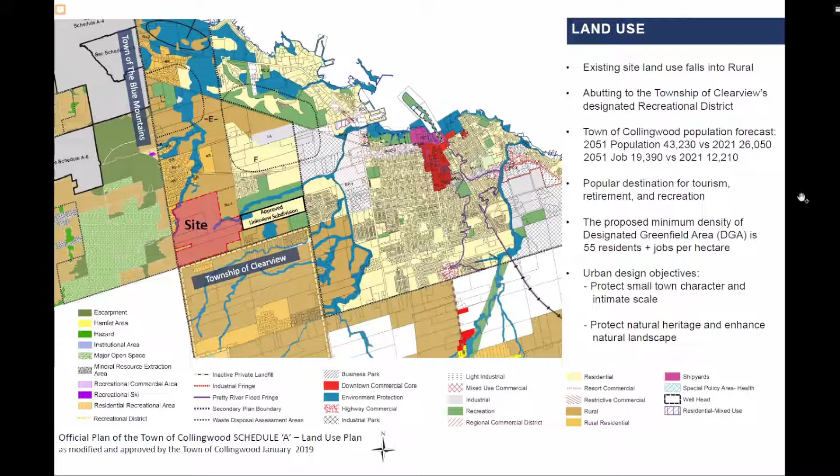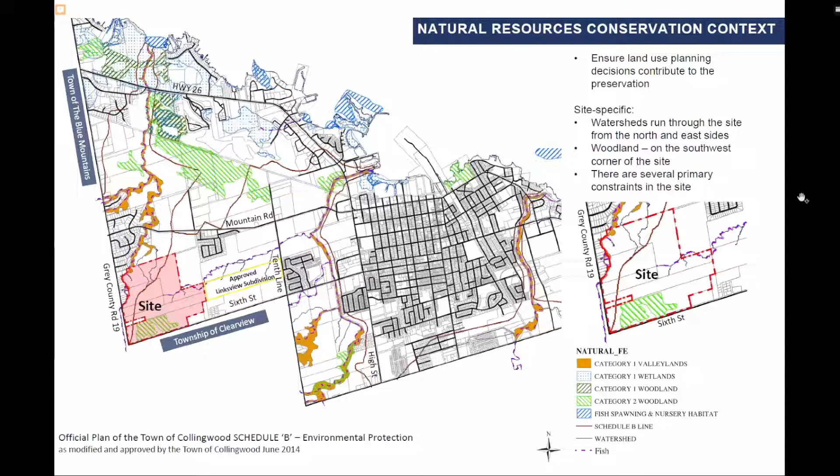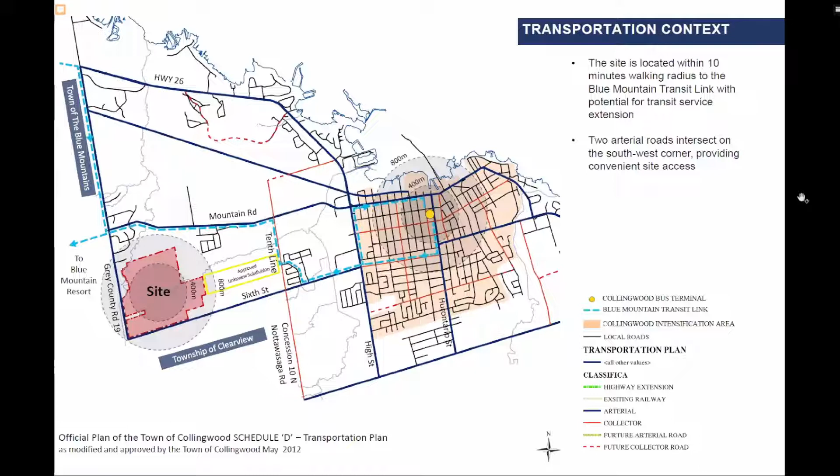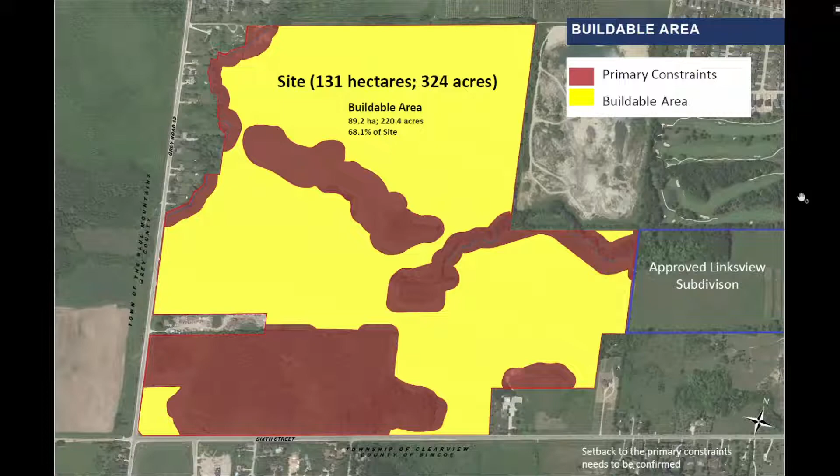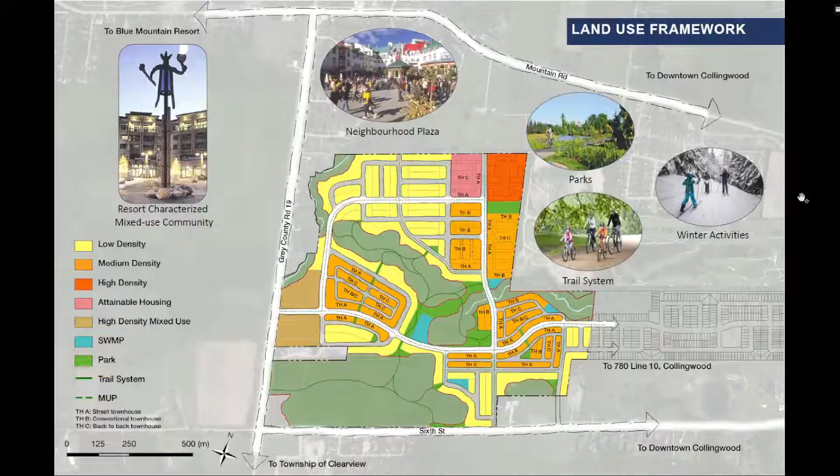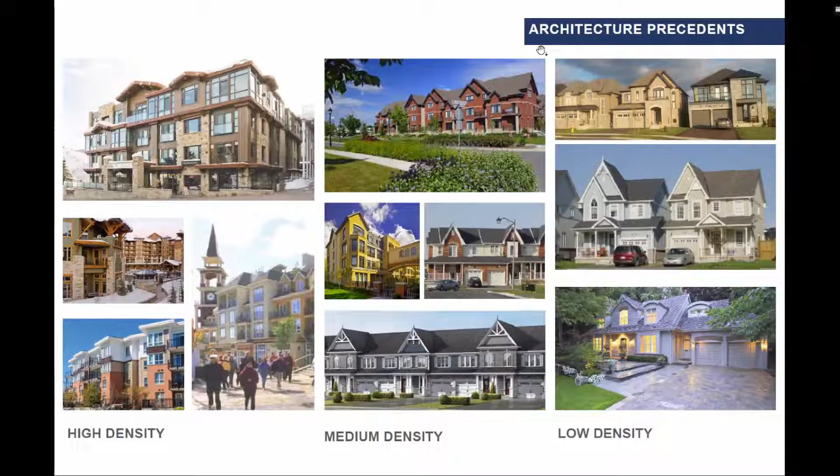My name is Shakir Rehmatullah, and I'm the president of FLATO Developments. Madam Chair and committee members, thank you so much for giving us the permission to come and present our vision with the town. We're looking forward to working with the town on this plan.

Once again, this is just a preliminary concept plan. This is our vision. We're not married to this plan. We understand it's going to go back and forth, and based on the input from the town staff, from council, and general public, this plan will be refined as needed. We just wanted to come in front of you to inform you.

We wanted to be transparent in front of you about the land assembly that we have done. We own the 100 acre parcel, which is draft plan approved, and then we have assembled this 324 acres.

We are in the planning phases. I know planning takes time and engineering takes time, and we understand that the town is going through infrastructure challenges, and we completely agree with the approach the town has taken. Our entire 100-acre parcel, which is draft plan approved, has also been affected by the infrastructure, the new policy, the interim control bylaw, and we agree with the town.

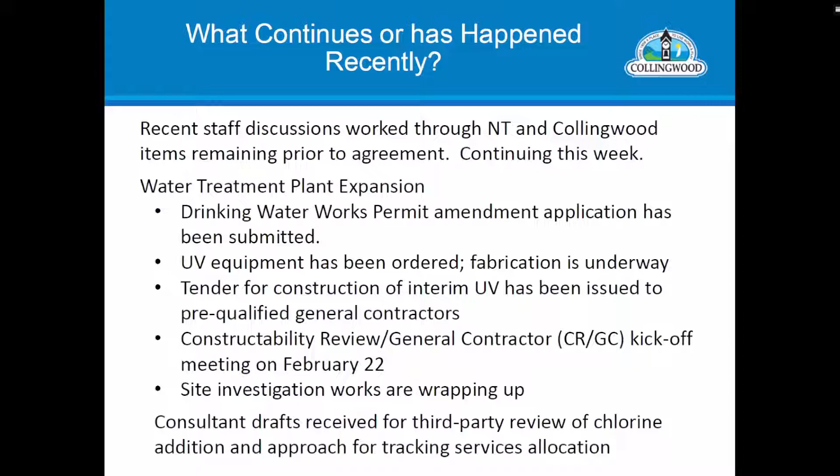The schedule has not changed. This is a graphical representation. The next things coming up are the completion of the preliminary design this spring and the finalizing of the agreement with New Tecumseh, but we are on track.

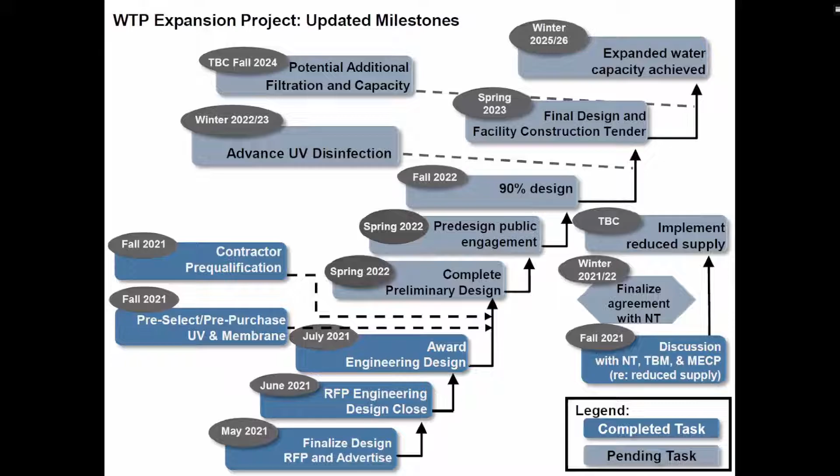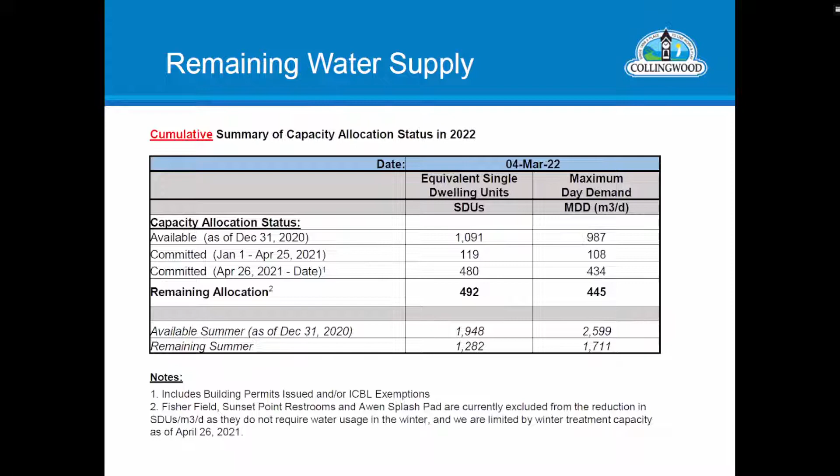The interim control bylaw exemptions I mentioned earlier in this presentation are exemptions to the interim control bylaw itself during the period of the interim control bylaw. Afterwards, water will be managed according to the recommendations, and the policy is coming forward this evening for committee's endorsement or review.

If you have an interim control bylaw exemption, please continue through the process to get your building permit. If you haven't been granted an exemption to date, we are processing planning applications at the staff side, going through reviews and making sure people know what's required. However, we're not intending to bring forward planning decisions to move projects forward to council until we have completion of the interim control bylaw. So with any luck, that will happen very shortly, and council can again commence making planning decisions of this type.

The second half of this is the planning policy study update. You can see from this graphical representation that we're very far along, and we're basically at the committee stage. Pending the decision tonight, in two weeks we would be at the council approval stage for a policy for the allocation of water and wastewater servicing.

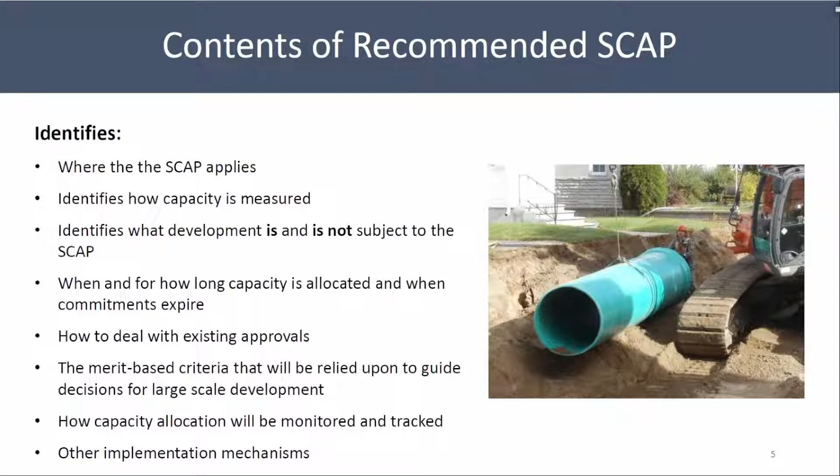As noted previously, this is the 3rd iteration of the policy document, and a number of changes have been made in response to community, staff, and legal input to add clarity where needed, to provide additional flexibility that recognizes the variety of contexts that apply in the decision-making process, and to remove any unnecessary provisions while retaining the core components of the overall merit-based approach to decision-making.

As Director Valentine indicated, all of the changes are shown in a track changes version of the policy on the town's engagement website. There are 25 changes I will quickly take you through. Some are more significant than others, but none are truly that significant. They all build upon the core policies that were initially established, and they continue to improve how the policy will work and be implemented.

So the first change we made is we added some additional context into the introduction to provide a further rationale for the need for the policy. This was designed, quite frankly, to provide the reader with a more fulsome explanation for the rationale for the policy itself, which of course is founded upon the need to manage a very scarce resource.

Secondly, the definition of additional residential unit has been expanded to now include additional residential units established in conjunction with institutional uses. This obviously provides additional opportunities for affordable housing and would be in addition to such units being permitted on residential and commercial properties.

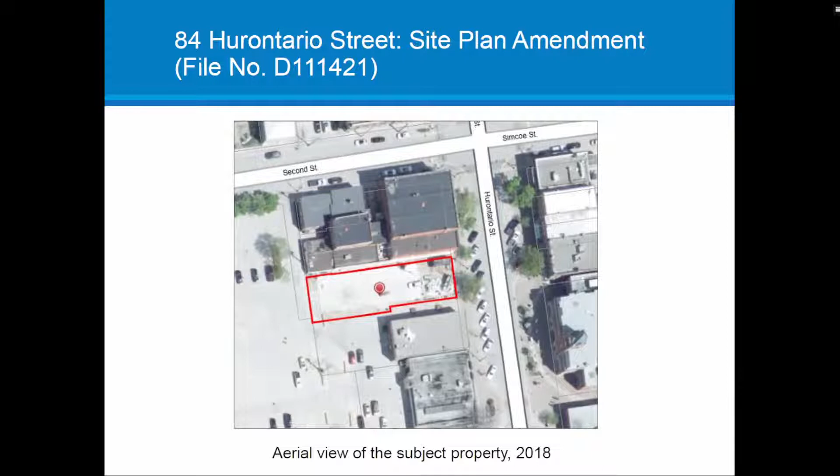Good evening, committee. As Director Valentine mentioned, this is a staff report on a site plan amendment for 84 Hurontario Street. Next slide, please. The subject property, known as 84 Hurontario Street, is located within the Collingwood Downtown Heritage Conservation District on the west side of Hurontario Street, south of 2nd Street, and immediately north of the CIBC Bank, and abuts town parking lot A to the rear. The property is 0.073 hectares or 0.18 acres in area, and the previously approved development for this site is known as the Regent. Next slide, please.

Council approved the site plan for 84 Hurontario Street on October 28, 2019. The approval is for a mixed-use development comprised of 12 apartments and 2 commercial units at grade. 13 underground parking spaces are proposed for the residential units. A heritage permit has been issued for the building. An encroachment agreement is still required as a condition of the site plan agreement to stage construction in a portion of parking lot A. Section 24 of the existing site plan agreement provides 2 years for the development to commence prior to the town being able to, but not required, to terminate the agreement with 60 days notice. The 2 years concluded on October 28, 2021, and the development has still not commenced.

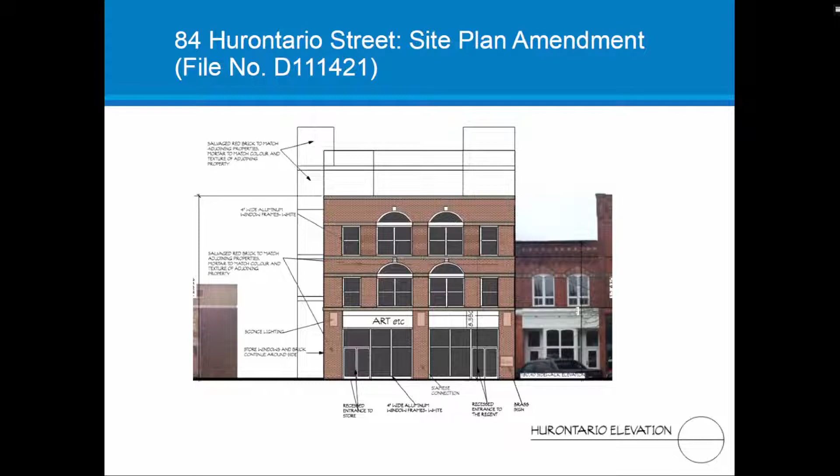The owner is now requesting that Section 24 be extended 1 additional year from the date of the execution of the agreement, ending October 28, 2022, to commence construction before the town would again have the option to exercise Section 24 if development had not yet commenced. The property received an exemption to the interim control bylaw in July 2021, and the one-year time frame for the proposed extension is consistent with the provisions of the servicing capacity allocation policy recommended for approval through the previous report, P2022-08. Next slide, please.

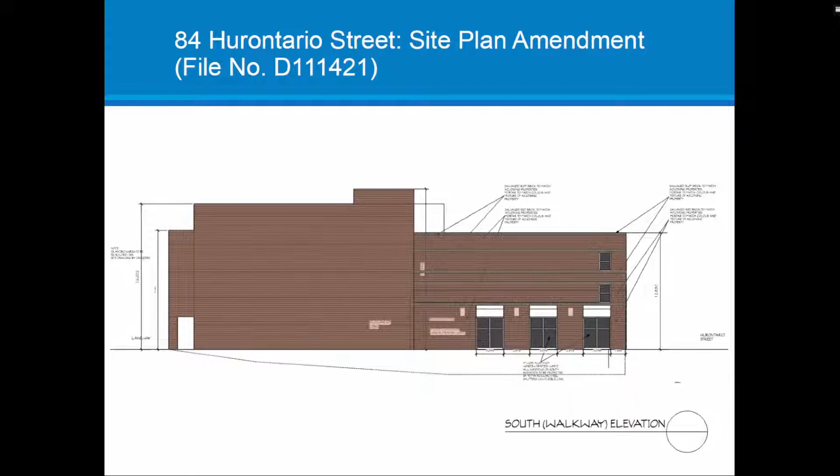No other amendments to the existing approval are requested, and the approved plans for the development would remain unchanged. This presentation includes the approved elevations for the building. The property is proposed to be sold, and this is a request as part of the purchase and sale agreement. Staff appreciate the owner's request to ensure there is certainty for the purchaser. The owner and purchaser are satisfied with the one-year extension because it is their intent to move to construction quickly. Staff are still in favor of the proposed mixed-use development proceeding, as it would infill an otherwise vacant lot on the town's main street, provide much-needed apartment residential units, and enhance commercial opportunities downtown. The proposal continues to be consistent with and conform to the relevant provincial, county, and town planning policies. Next slide, please.

It is the opinion of planning services staff that this proposed request for a site plan control amendment is appropriate and consistent with and conforms to the relevant provincial policy, the county's official plan, and the town's official plan. As a result, planning services staff recommend that council approve the site plan amendment application number D111421, and that council enact and pass an authorization bylaw to execute an amending site plan control agreement for 84 Hurontario Street, with Section 24 providing an additional 1 year for construction to commence. That concludes my presentation, and I'm happy to answer any questions.

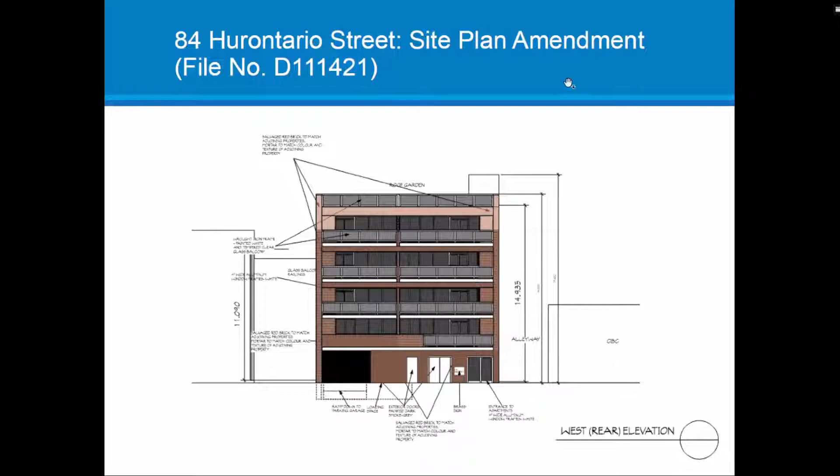Thank you for that. Clerk Almas, would there be any members of the public who have any comments? Thank you, Chair Hamlin. Again, if you wish to address the committee regarding this application, please press the raise your hand feature at the bottom of your screen. There's no one at this time.

Okay, thank you. I'll bring this matter to the floor. That's staff report P2022-07, authorization bylaw to execute an amending site plan control agreement, 84 Hurontario Street, the Regent, file numbers D111421 and D112117, and that council approve site plan amendment number D111421, and that council enact and pass authorization bylaw to execute an amending site plan control agreement for 84 Hurontario Street with Section 24, providing an additional 1 year for construction to commence.

Could I have that motion moved by Councillor Jeffery, seconded by Councillor Doherty? Any comments or questions from the committee members? Seeing none, bring this matter to a vote. All those in favor? And that's passed unanimously.

Thank you. Next matter on the agenda is P2022-09, draft plan approval extension request for Red Maple. Director Valentine, would you like to start this one off? Thank you again, Madam Chair.

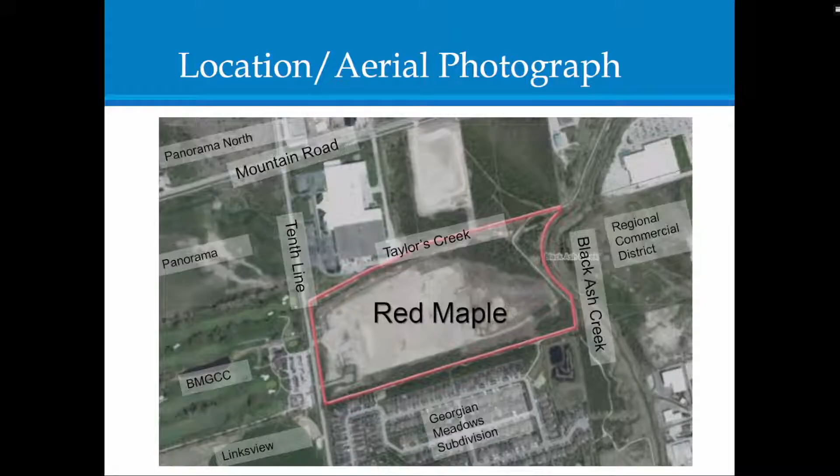The subdivision proposes 278 residential units, consisting of lots for 131 single detached dwellings, 56 street townhouse dwellings, and a block for 91 condominium townhouse dwellings. The subdivision also includes a number of blocks for parkland, environmental protection, walkways, and servicing purposes.

The draft approval was originally given in March of 2013. It was subsequently revised in November of 2014 and has been extended twice, the last being in 2019. The developer, a numbered company, 2721733 Ontario Incorporated, has picked up the property from the previous owner and has requested a 3-year extension as the current draft approval lapses on March 25th, 2022. As I understand it, the property changed ownership in late 2020. Next slide, please.

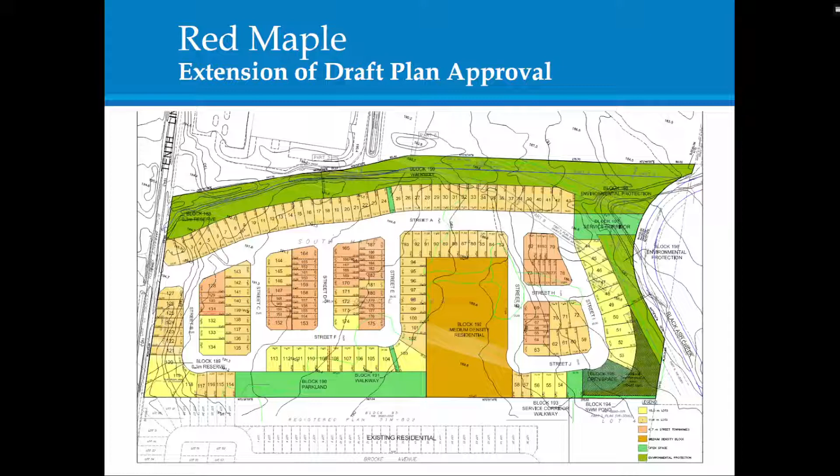Given the challenges the municipality is facing with servicing, it's important to view this request in the context of the proposed servicing capacity allocation policy, SCAP, discussed earlier this evening. The policy indicates that if lands are subject to draft plan approved plans of subdivision or vacant land condominium descriptions before the allocation policy comes into effect, the town will seek to amend the conditions of draft approval for all existing files to confirm there is no capacity commitment. If uncommitted hydraulic reserve capacity exists within both the water treatment and wastewater treatment plants, the developments would be evaluated against the allocation policy in effect at the time of final approval or registration.

With the immediate action being required, at the next council meeting on the 21st, given that it lapses on the 25th, the conditions of draft plan approval have been appropriately modified to address servicing capacity allocation challenges. Should the SCAP be approved, servicing capacity allocation would occur at plan registration. This approach is consistent with how other draft approval extensions have been dealt with over the past year.

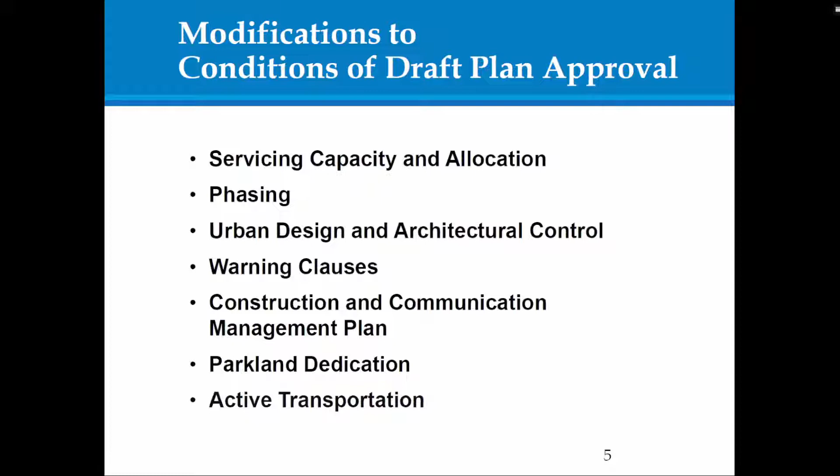As noted, the owner has requested an extension of 3 years to March 25th, 2025. This new lapse date is consistent with the approach taken for the other draft approved plans of subdivision and the extensions granted over the past year. It also includes approvals for the nearby Panorama, formerly Mair Mills Villages, draft approved subdivision, and the Linksview draft approved subdivision that was mentioned earlier this evening.

In combination with Red Maple, these 3 subdivisions do require extension of the trunk water main from 6th Street up the 10th line. They also require the construction of the Stewart Road booster facility, which is the reservoir and pump station. So the Red Maple draft plan approval extension is aligned with these other draft plan approval extensions, and that alignment would allow for coordination and financing of these needed infrastructure improvements.

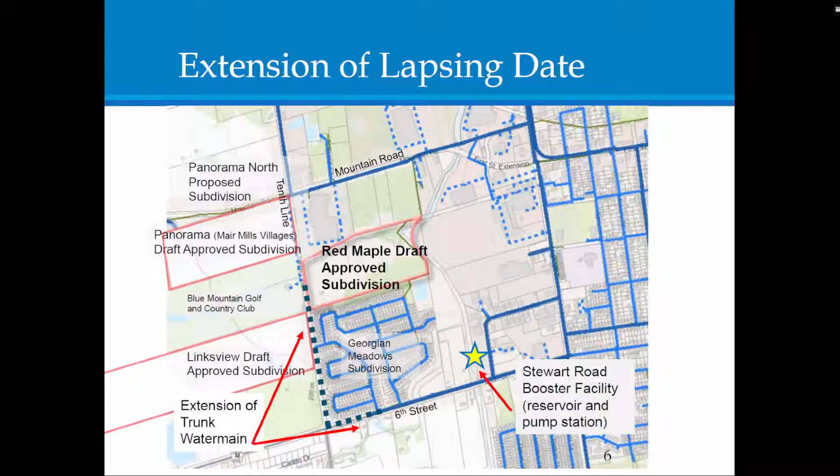Based on the review undertaken with this request, planning services have generally concluded that the Red Maple draft approved plan of subdivision continues to have merit, and that the extension to the draft plan approval, subject to the modifications listed, continues to be appropriate and has planning merit. In general, the development proposal is consistent and conforms with applicable provincial and municipal planning policy, including the provincial policy statement, the growth plan for the Greater Golden Horseshoe, the Simcoe County official plan, and the Collingwood official plan. The lands are already zoned to permit this development.

The development would help advance needed servicing, and it would also help advance transportation and community infrastructure for the area. What's more, it would provide and protect for other community benefits as well. In this regard, the southeastern corner of the plan was modified with the red line revision back in 2014 to include additional open space above and beyond the parkland requirement, and also had the benefit of protecting additional trees at that location.

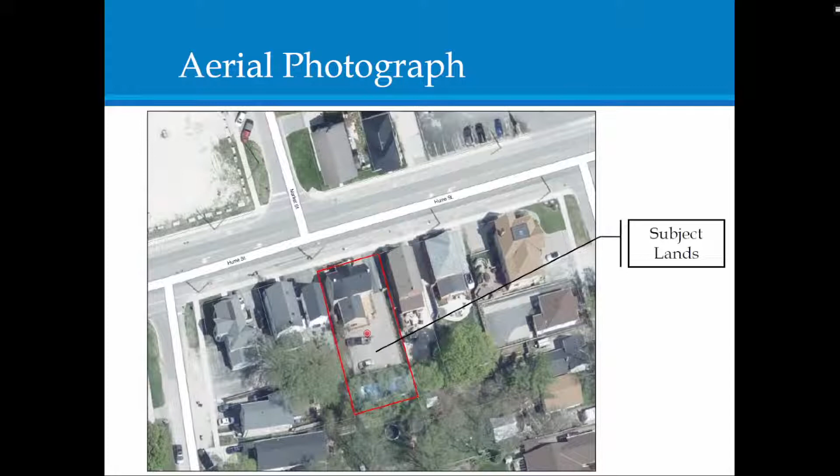This is an aerial image, a 2018 aerial image of the subject lands, which are located on the south side of Hume Street, opposite Market Street. Surrounding land uses include commercial uses to the east, west, and north, and residential uses, primarily single detached dwellings, to the south. Next slide, please.

This property was the subject of a site plan control agreement in 2006, and the proposed amendment before committee's consideration this evening involves the construction of an 80 square meter, or 861 square foot, second story addition to an existing single story detached accessory commercial building located at the rear of the property to create one accessory residential apartment unit. A total of 5 surface parking spaces are provided, including 1 parking space in the detached garage, to support both the existing business office use and the proposed residential dwelling unit.

I also confirm that all existing landscaping is to remain on the subject property. The proposed development is consistent with and in conformity with all of the applicable planning instruments outlined in the staff report, with the exception of 2 non-conforming setbacks that were the subject of a recent minor variance application. The interior side yard and rear yard setbacks of the existing detached accessory building do not conform to the town's current zoning provisions.

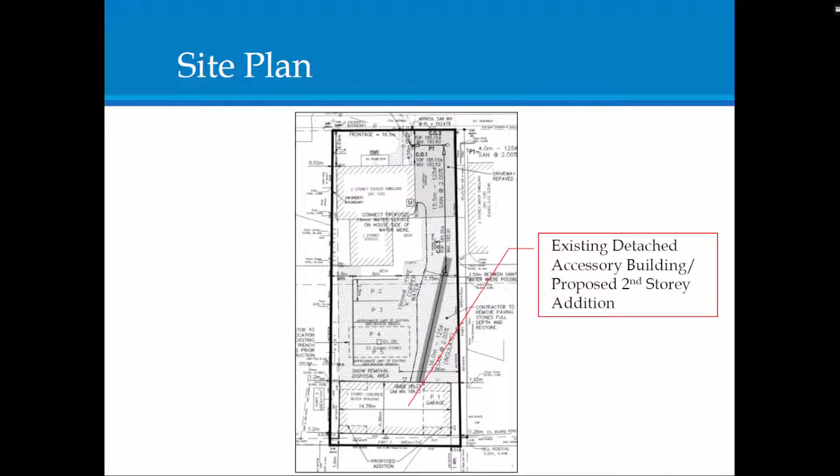In order to facilitate the second-story addition, a minor variance application was considered by the Committee of Adjustment on February 24th, 2022, and the minor variance was provisionally granted. The minor variance is currently subject to a 20-day appeal period, with the deadline for appeals being today. Planning Services confirms that no appeals have been submitted to date. The proposed site plan amendment was circulated to town departments and external commenting agencies, and there were no objections to the proposal.

The second-story addition is proposed to be accommodated through the construction of 2 shed dormers located in the center of the existing structure. It is anticipated that the majority of the addition will be concealed by the existing 2-story main commercial building, and the existing detached accessory building is currently comprised of painted concrete block. The proposal is to clad the entire facade of the building in composite cladding in a smoke timber color that would complement both the adjacent red brick commercial building to the east, as well as the existing main commercial building.

The recommendation before the committee this evening is that council approve site plan amendment application file number D11222, and that council enact and pass an authorization bylaw to execute an amending site plan control agreement for the development of a dwelling unit in a portion of a detached accessory commercial building on the property municipally addressed as 120 Hume Street. The amending site plan control agreement requires payment of a $5,000 administrative and legal deposit, a $4,000 engineering services fee, and approximately $9,000 in securities. Payment of these financial requirements is required prior to council's consideration of the file on March 28th, 2022.

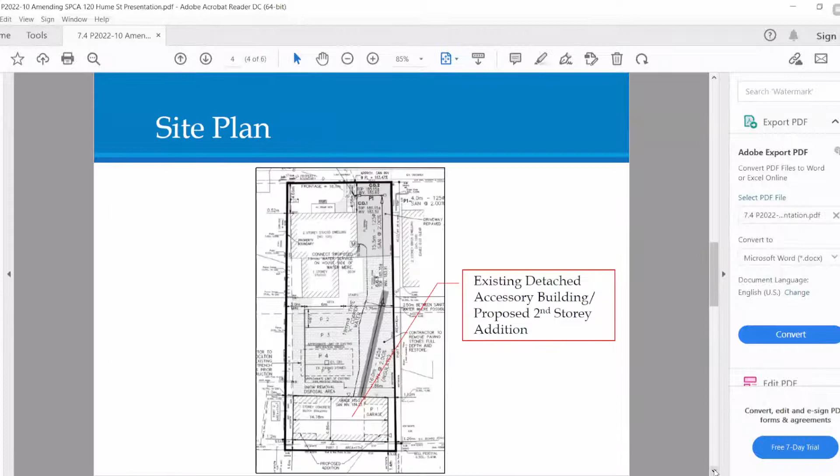Just to explain sort of—is that possible, Clerk Almas? Sorry, just for clarification, of the staff report or of the presentation? Oh, I'm sorry, slide 5 of the presentation. Thank you. Just back one, thank you very much.

Thank you. So I just wanted to provide a visual as I walk through what we're proposing here. The reason for proposing this is to be able to move forward in an expedited manner, one we feel is reasonable for the size of development occurring on the site, with regards to cash in lieu. As you can see, and as Lindsay described, there is a dormer shed that would be the addition of livable area to the property, to the existing accessory structure.

We're presenting the option to calculate the cost to build the additional living area and take 5% of that. The building is in existence—the main floor is already there, the garage is already there—so we think it would be appropriate in this circumstance to take that additional floor living area and take 5% of it.

Again, I can give the actual numbers. We have a quote from the builder of approximately $60,000, which at 5% would represent a cash in lieu payment of $3,000. That's very close to the original cash in lieu already paid for this site, which we feel would be quite reasonable in this scenario.

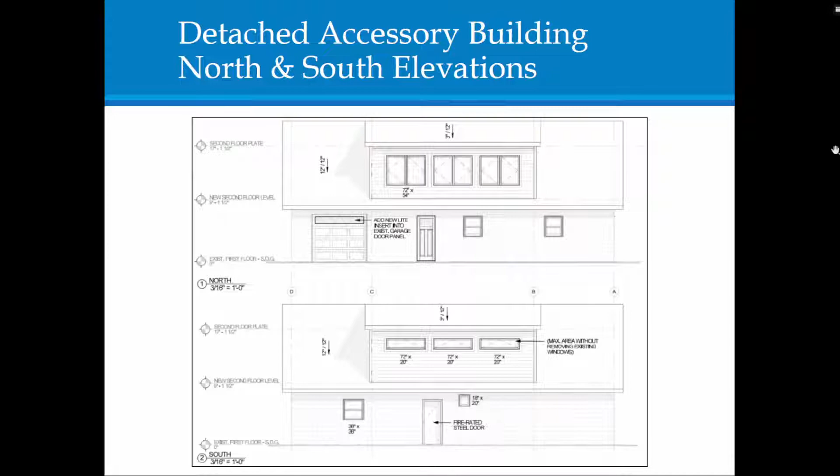I'm available for any questions, if through you, Madam Chair, anyone has any questions regarding our ask this evening. All right, well, thank you. Ms. Cutts is here—would anyone like to pose a question to her? No, I think you've done a great job, and there's no questions, so thank you. Thank you very much. Is there anyone else, Clerk Almas?

No, okay. So I'll put this matter on the floor by reading in that Staff Report P2022-10, Authorization Bylaw to execute an amending site plan control agreement, 120 Hume Street, be received, and that Council approve site plan amendment application file number D11222, and that Council enact and pass an authorization bylaw to execute an amending site plan control agreement for the development of a dwelling unit in a portion of a detached accessory commercial building at the property municipally addressed as 120 Hume Street. I have Councillor Jeffrey moving and Mayor Saunderson seconding that.

Thank you very much, Chair Hamlin. I agree that this is an important thing for us to be doing, given our situation in terms of being able to provide housing. I would propose an amendment, further that an alternate method of calculating the cash in lieu of parkland dedication satisfactory to the Director of Planning be applied. Okay, thank you, could I have a seconder? And that's Councillor Doherty, thank you.

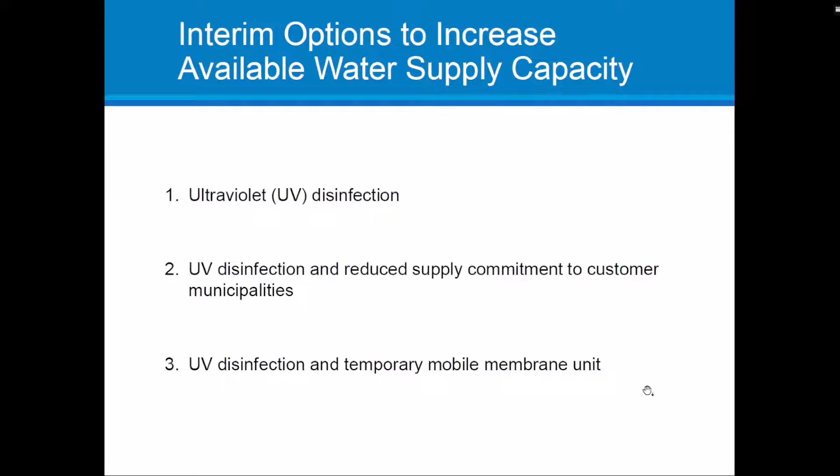If no additional development is allocated water supply capacity between now and the end of 2022, when the interim UV is scheduled to be commissioned and online, the water supply capacity available until expansion could increase to 3,268 cubic meters per day, or 1,711 cubic meters per day if a 5% factor of safety is applied. This translates into approximately 2,450 SDUs, or 1,282 SDUs with a 5% factor of safety.

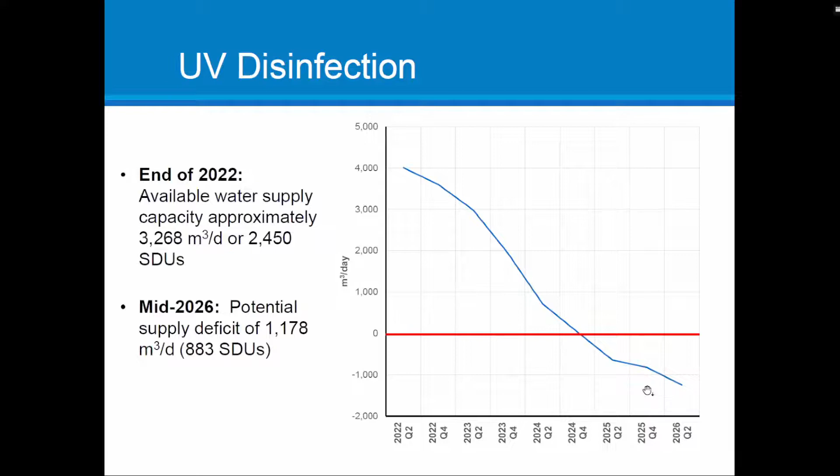However, when development water supply requirements are forecasted based on proposals that have already been submitted to the town, it does not appear that the addition of UV disinfection will ensure sufficient water supply capacity through the construction and commissioning of the water treatment plant. Next slide.

Staff has heard from developers and council that Collingwood development growth is potentially being stifled while we wait for the expansion. So we felt it was important to consider a reduction in water supply to our customer municipalities during this 4-year period when we are managing Collingwood's development capacity allotments.

However, any reduction in supply will need to be negotiated with the individual municipalities. Currently, the town does not have a supply agreement with New Tecumseh, and the proposed interim reductions have been presented in the draft new water supply agreement. The town does have a valid supply agreement with the town of Blue Mountains that includes a minimum of 1,250 cubic meters of capacity, to which the town of Blue Mountains contributed capital funding. Any reduction in this supply would need to be negotiated and agreed upon with the town of Blue Mountains. Next slide.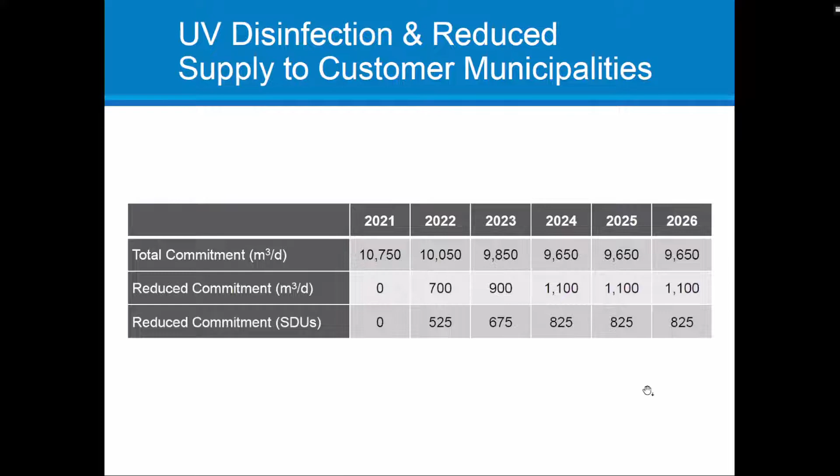The proposed water supply commitment reductions would result in a projected water supply deficit of approximately 58 SDUs around the time of the water treatment plant expansion commissioning. But since this is just a projection based on the best information available at this time, it appears to be within a range that can be managed by the town through a water allocation policy. It is important to note that the town intends to complete semi-annual reports on remaining available water supply allocation, so the proposed reductions to customer municipalities can be reconsidered in the future if required.

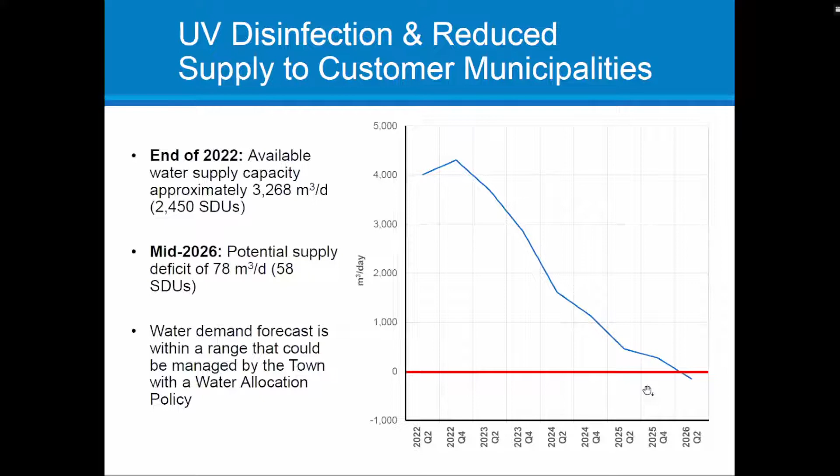When evaluating the option of adding a temporary membrane mobile unit at the water treatment plant, the benefits seem obvious. We can add it to the engineer's scope of work for the treatment plant expansion project. The rated treatment plant capacity will be increased to make significantly more water supply capacity available to development in Collingwood. And there's also the benefit of improved redundancy with our existing membrane treatment process.

The challenges are a little less obvious, but are very important to this discussion. The addition of a temporary membrane mobile unit will add significant challenges to the constructability of the water treatment plant expansion. Not only will we need to find space and work around the membrane unit, there will be a network of pipes and other equipment needed to support them. There are also very few membrane mobile units available for rental, so the decision to enter into a rental agreement would need to be made well in advance, and could also be impacted if another customer who already has a unit installed requires it for a longer period of time.

The addition of these units would also require an amendment to our Ministry of Environment, Conservation and Parks approvals for operating the water treatment plant. On the whole, it will add another layer of complexity to the expansion project, which could result in other tasks for that project being delayed due to the change of focus.

While we do have membrane filtration at the water treatment plant already, the membrane mobile unit may not be the same type of membrane that we currently use, and would require additional training and operating time for the operations team. The total cost to implement this option will be dependent on the rental time, but is projected to be in the $3 million range if a decision is made to move forward with this option by the end of 2022.

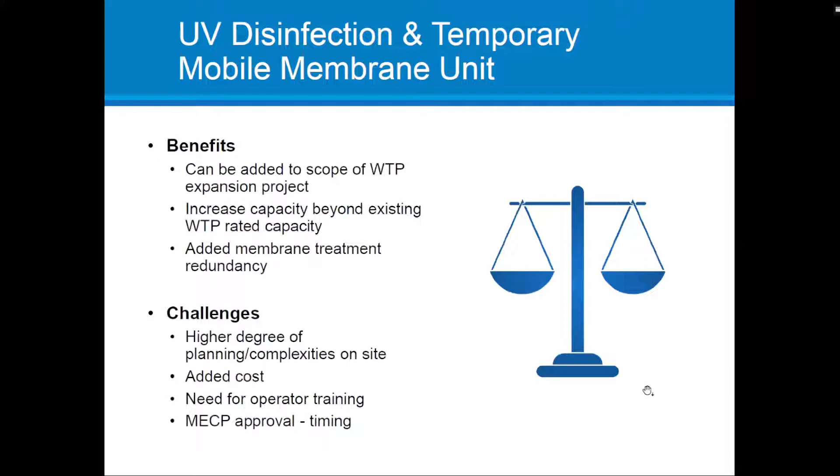As the membrane mobile units are only available in 5,000 cubic meter per day production capacities, the addition of one of the units at the water treatment plant would significantly increase the available water supply capacity to a level well above what the town projects is required prior to the scheduled commissioning of the expanded water treatment plant.

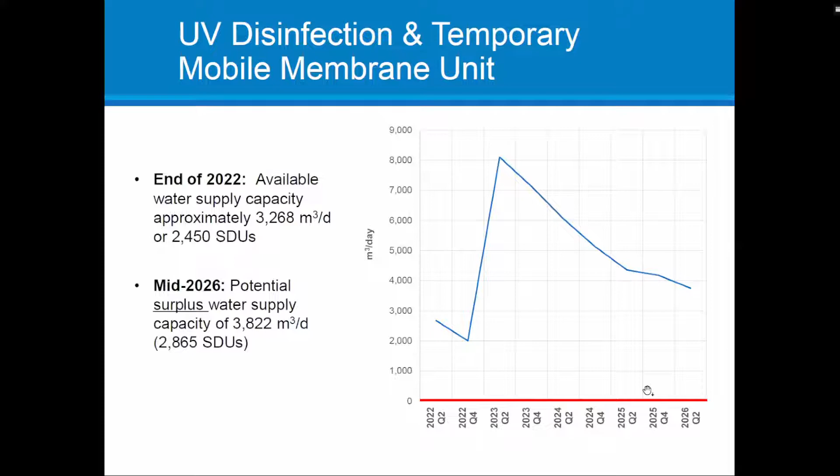So based on the outcome of this assessment, it is recommended that staff continue to move forward with the interim UV disinfection, start reducing supply commitments to customer municipalities, and continue to work on a water allocation policy to ensure the remaining water supply capacity is not overcommitted through the commissioning of the water treatment plant expansion.

That's the next slide, and that's all. We'd be happy to answer any questions of the committee at this time.

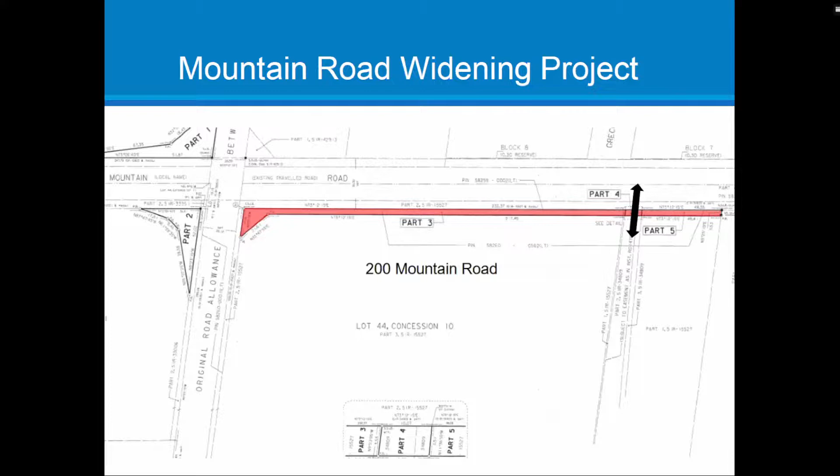And we can see it on the next slide with the aerial overlay. So they've requested it be presented in advance of the future staff report that will be coming forward on the remaining properties, and that's why it's before you this evening. And that is it.

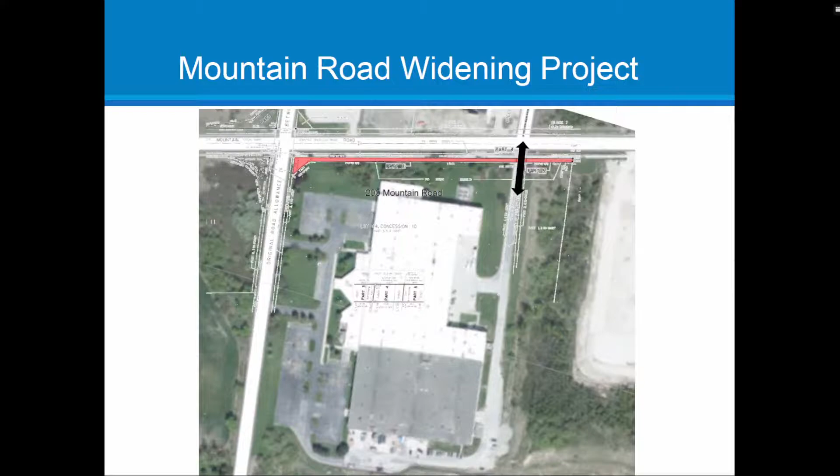Okay, thank you for that. Would there be any members of the public who wish to address the committee on this matter? There is not at this time, Chair Hamlin. Okay, thank you. Any members of the committee have any comments? Nope.

And I can't remember, have I asked for a mover and a seconder? No. Mover and a seconder: Deputy Mayor Hall and Councillor Doherty. There's no comments. All those in favor? And that passes unanimously. Thank you.

Item 7.7, this is with respect to FS 2022-02, expansion of seasonal paid parking. Okay, who's going to be addressing the committee on this matter?

Through you, Chair Hamlin, I'll just introduce the project. We decided it was better to bring it back to DNO. The original one was passed and put forward and in progress and has been successful. So going forward, we thought this was the best place to present the expansion of paid parking program. Acting Manager Harold has been doing an awesome job on this, did a lot of work moving this forward with help from Parks, Rec and Culture, Dean Culver. So I'll let Adam take over, and hopefully you will appreciate Adam's presentation tonight. Thank you.

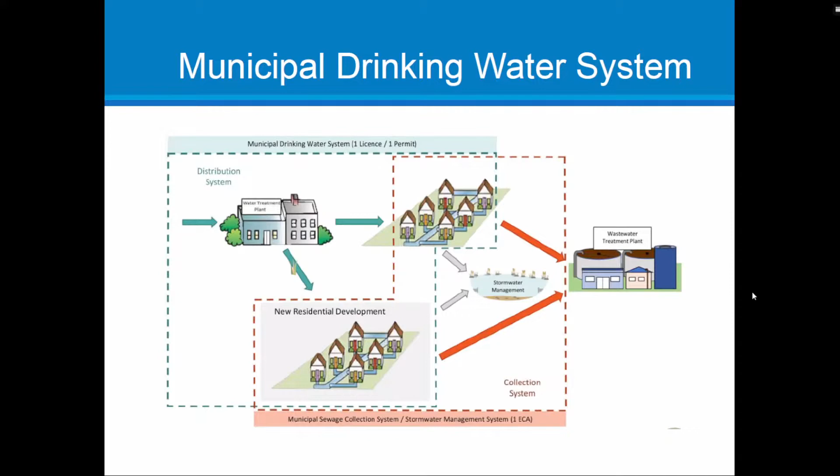The consolidation of all of these approvals will reduce regulatory burden, provide clear and consistent requirements for all municipalities, and establish a holistic view of sewage works across the municipality and across the province. For many new projects with the CLI ECA, it will delegate approval to the municipalities for smaller works to proceed without having to apply for additional ministry permission, assuming that the project meets the criteria to be pre-authorized work, and that will be defined within the ECA document.

All our applications were submitted by March the 3rd, which was before our deadline, with a small application fee, and we hope to see an approval, expecting an approval turnaround time of 3 to 6 months. And that's all.

Okay, well, thank you for that update. Any questions or comments from our committee? No? You did a great job. No questions. Thank you.

Okay, the next item on the agenda is for public delegations. Clerk Thomas, would there be anyone who would like to address the committee? Thank you, Chair Hamlin. We do have an attendee still. If you wish to address the standing committee, please press the raise your hand feature. No, there isn't, Chair Hamlin.